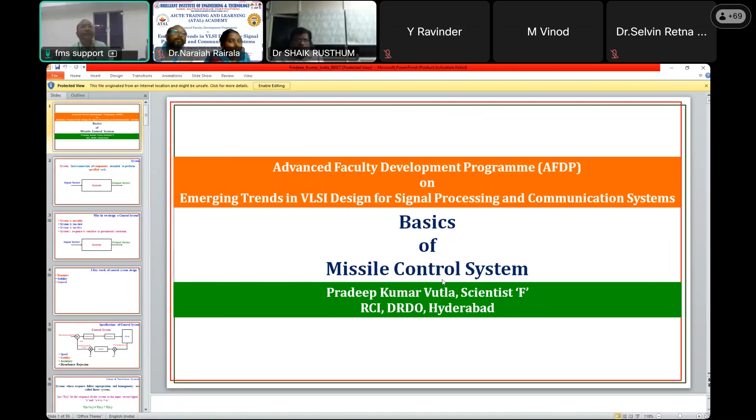Sir, before starting the basics of the missile system, is the slide shared clear to you, sir? Across all? Yes, sir, yes, sir. Yes, sir, yes, sir. Right.

Thank you. Let us start with a system, a basic system. These need not be the standard definitions, but acceptable and understandable to give you a feel of what exactly a system is. It is just an interconnection of components to perform specified tasks. The components of any given system—it may be a Xerox machine, a fan, a missile, or a cycle which we ride—are connected together by a cause and effect relation. So every system has an input.

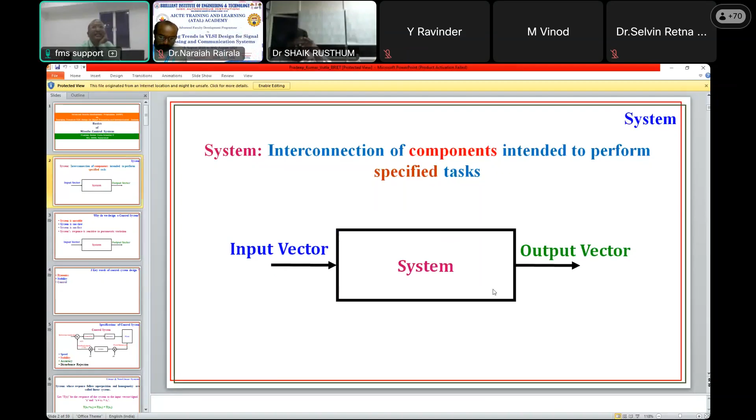Next, why do we have to design a control system for a system already existing? It so happens that the system could be unstable.

Sir, I'm not getting the voice here. Is anyone interrupting? No, your voice is clear, sir.

Right. Sir, the basic objective of design of control system goes in these lines. If the system is unstable, we need to stabilize it, or the response times of the systems are not up to the mark, not up to the requirement, or the system has got parametric variations and the response of the system is very sensitive to the parametric variations.

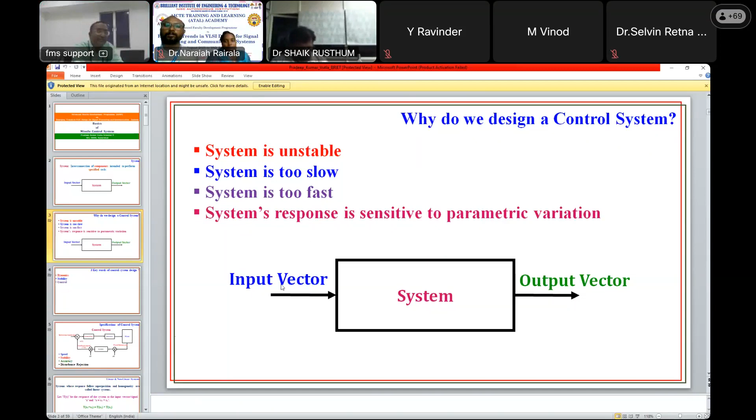In the field of control system, we came across these three terms invariably: dynamics, stability, and control. When we say dynamics, it involves the mathematical modeling of a given system, understanding it, and checking the stability of the system that is already mathematically modeled via dynamics -- understanding the governing dynamics of the system, studying it mathematically using the mathematical model, and then commenting on the stability of the system.

Then we can see whether the system is stable or not. If not, it's our onus to design a control system to stabilize it. Stabilization I will expand in the subsequent slides.

And control of the variable -- the system has to be stabilized and specific variables are to be controlled because we want them to behave the way we want. So the control comes in that aspect. So as a control engineer, we live in this three-dimensional space: dynamics, stability, and control.

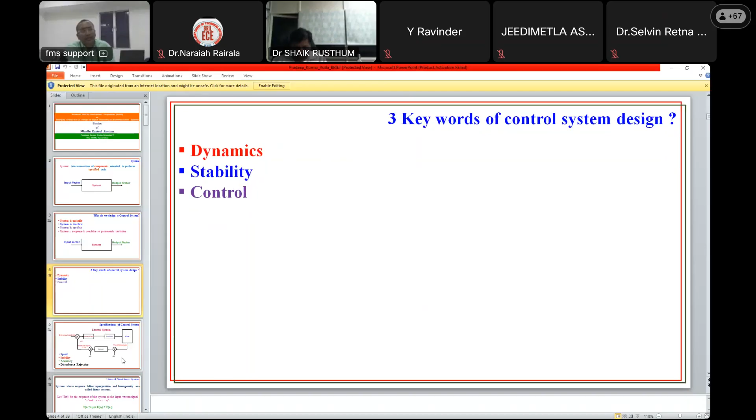Sir, is the voice clear? Yes, sir. It's clear, sir. Proceed, sir.

In an actual physical manner, there are two kinds of disturbance inputs which I would like to emphasize because I started with dynamics. In the previous slide, I started with the dynamics of the plant. No tool or no way can we completely represent the dynamics of the plant -- a perfect replication of 100% behavior of a plant is not possible.

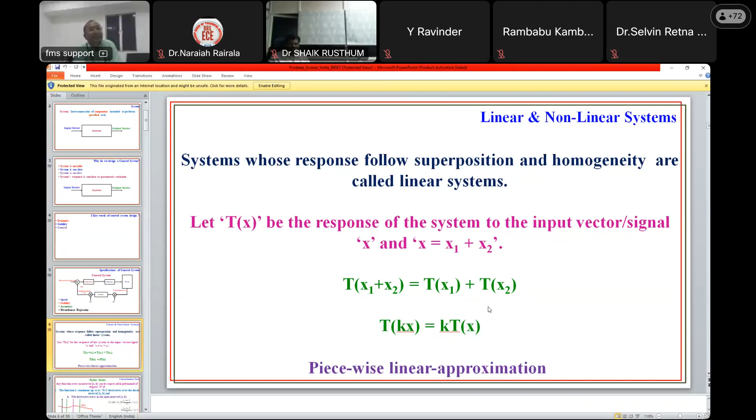And the main tool of linearization that comes to be is the Taylor series. Although these definitions are well written in the textbooks, I'm not going through all those things. I want to make you have a feel of what exactly happens, what functions do we see in the missile industry, and how do we handle it.

That's my part of handling the course like this. The Taylor series basically gives the structure of a function -- how the functional value and the derivatives govern the functional value, the instantaneous functional value.

Now, if we take care that x is so close by to c, in the expansion the higher order terms go to zero -- they become negligible.

This is the way we linearize the system in aerodynamics. We linearize the system and use linear control system design philosophies. Although we are introduced to single loop control systems at our Bachelor of Engineering level, it is rare that we actually use single loop control systems. We go with...

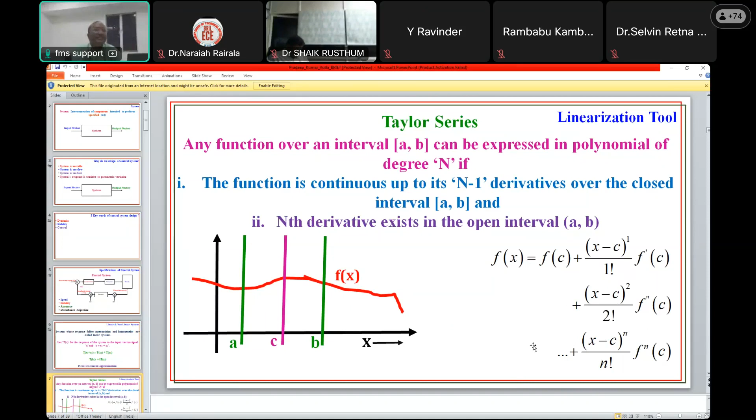So apart from linearization, I want to make you have a feel of the functional behavior. The functional behavior is depending on its derivatives also - what we are seeing is derivatives also. So in order to control a signal, if we could control the derivatives also, the shape of the signal becomes very well. This motivates us to use multi-loop control systems when we are expecting a perfect control of the expected control variable.

Going into the next level, time variant or time invariant - the definitions are very known to you. For a given missile system, missile mass changes as it flies. There is a propulsion system that is accelerating the vehicle to higher velocity, and the vehicle is flying, it does obtain the aerodynamics and so on. So the aerodynamic plant happens to be a time variant system, and while designing a control system for a missile, we time slice the plant and extract the transfer functions and go for the design of the control system.

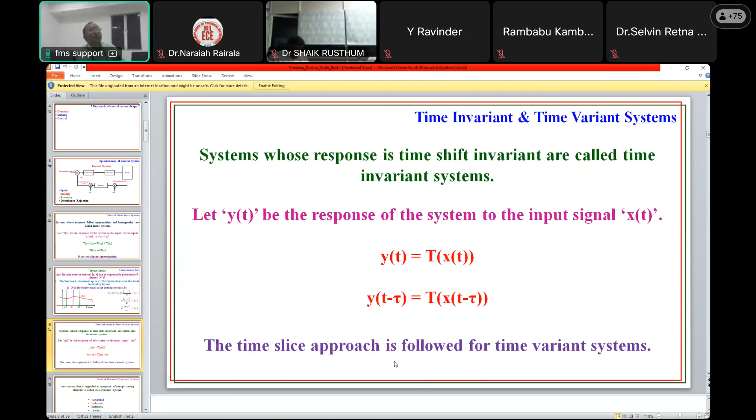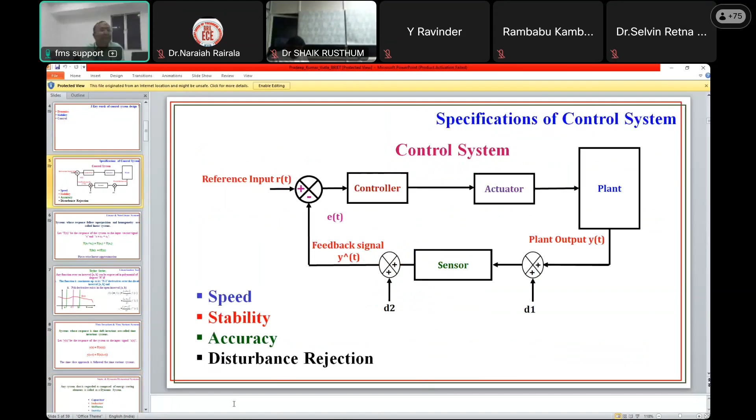Control system - I'm going back to the very first slide. This particular box, we are referring to as PID controllers, those compensators which we academically learned at BE level, and now we are applying them here. Going into the next level, the dynamical systems we face - it is ubiquitous that everywhere we face dynamical systems.

Sir. Sir. It is clear, sir, okay. Yeah, audible and clear. Right. Thank you. Thank you for the update.

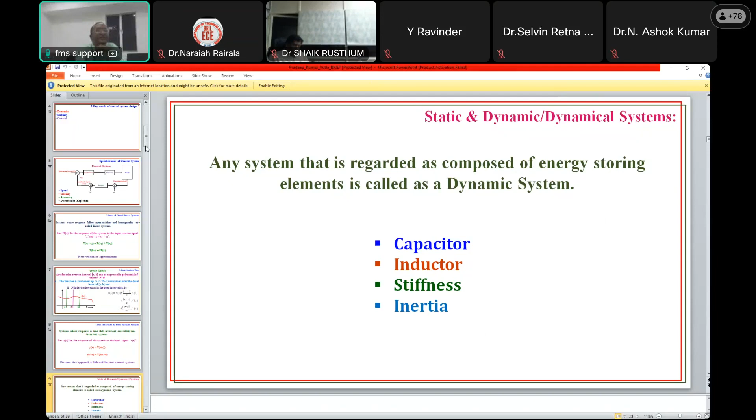The dynamical systems are ubiquitous. What we mean by dynamical system - when we are mathematically modeling energy storing elements like capacitors, inductors, or if it comes to mechanical things, stiffness and inertia, we call them dynamical systems. As electronics and communication engineers, wherever there is storage of energy, there come some differential equations. So dynamical systems are characterized by differential equations. When we mathematically model them, we see that they are represented by differential equations.

As a small example, just rehashing our basics - if a differential equation is formed by linear combination of a function and its derivatives, it's a linear differential equation. And if that linear combination has got a variable that is the independent variable, it is a time variant system. But if it is not a linear combination, that means the function is in multiplicative form - function multiplied by its own derivative - these kinds of systems are referred to as nonlinear systems.

So just having a brush up of our higher engineering mathematics, I'm taking you through those things. Wherever we are seeing a differential equation, this is the plant, and this is the forcing function. Forcing function is a function that is in our hand. We can control the plant by actuating this, by proper modification of this forcing function. This design of the forcing function is nothing but design of control.

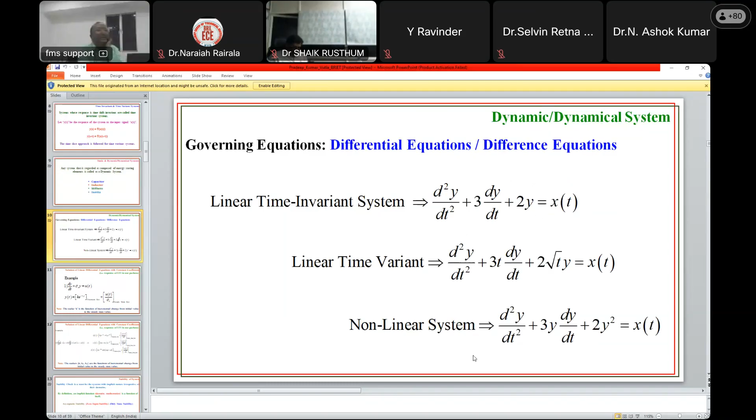It is a linear differential equation. When we express the response of it, it has got two parts - transient response and steady state response. The transient response, if we see, is characterized by the root of the auxiliary polynomial here. Everything I am showing here is in the time domain. Let us appreciate the time domain first, then frequency domain, then the transfer function and things like that. First, let us understand at the very first level what happens in the time domain. So this transient response is mainly characterized by the property of the system, that is sigma naught.

Before going on to the stability of the system, it is just that linear systems are so simple that the response is also a linear combination of transient response and steady state response. Since this simple addition, simple scaling, is easy to design, easy to test, easy to evaluate, people still go by the linear control system philosophies. Anyways, they impart 90% of control - they impart good results. Similarly, I'm taking you through a second order differential equation. When we see, based on the nature of roots, we have transient response and steady state responses like that.

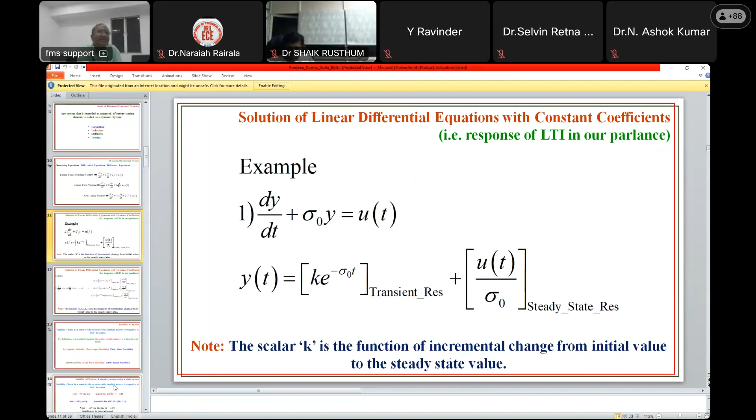For a linear system, both bounded input bounded output stability and asymptotic stability state that the poles of the system, the roots of the differential equations, have to be on the left half of the S plane. S is a complex plane, which you already know. We express it in sigma plus j omega, the real part and the imaginary parts.

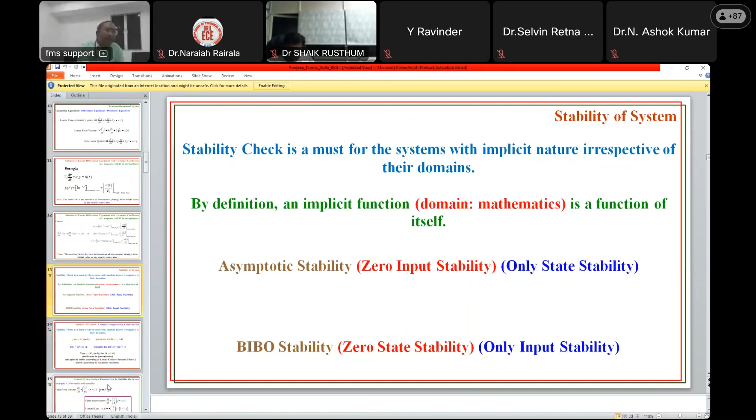Straight away, a small example: if a person is doing C language, he has written something like y equal to k into y, previous y, a simple example. This has formed a loop basically. The function is depending on itself. This is a basic C language example.

Suppose if the value of k were less than 1 in magnitude, this would be a stable system. If it is disturbed from 0 to a non-zero state, it will come back upon progressive multiplications by less than 1. It is brought down to 0.

That's how stability works here. And if the value of k is greater than 1, imagine this goes out of bound. What if k is 1? The value of whatever the disturbed value apart from 0, if non-zero, keeps on oscillating. We call this system an oscillatory system.

In linear philosophy, this is a marginally stable system, because the poles are on the j omega axis of the S plane, and according to Lyapunov, that too is a stable system.

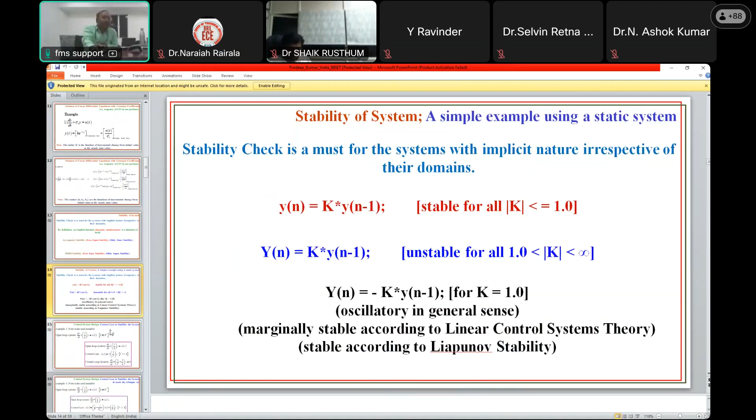A small exercise that gives you a feel of what control engineers do, whether it is a missile, a cycle, bike, or any automotive, or any system like that, any biomedical system also. All are governed by the differential equation, basically dynamics, the mathematical modeling of the governing dynamics of the system. Let's have a system like this, where tau is a positive real number.

This is a fashion. All that we needed was a sensor and a gain. A sensor to sense the output of the system, and a gain over that gives our desired response, and we have placed it, and we have a desired pole in here. This is the way control system design happens, which I had shown you in the first, a closed loop negative feedback system.

Little more on that, same problem statement. Measure y and place y means we have a sensor that measures y and places a gain on that, stabilizing the system. And if we have further control, we can place a reference input in here. If now the system is made to follow this reference input, unlike the previous system, now it is a tracking system. That means we have stabilized the system and designed a control for the system for it to behave in the way we like it.

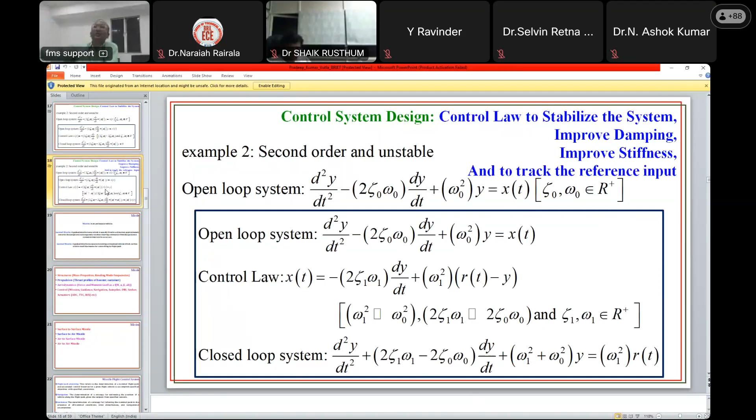So here ends the very basics of a control system. That means we have a control system which may be stable, unstable, or response times are not meeting. To stabilize the system, we have to bring the poles on the right half of the S plane to the left half and place them in a particular fashion as governed by our root locus, which we had studied at our BE level. That is the limit for a given closed loop control system, and we check whether the response times and the stabilities are met. Once the response times and stabilities are met, the design what we had done is perfect.

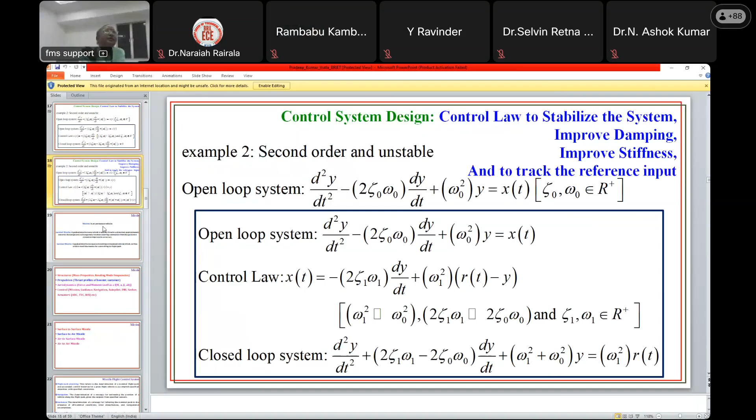Having completed those basics, now I am taking into the missile parlance. Missile is just an aerospace vehicle meant for delivering an object from point A to point B, from launch point to target point. And depending on starting from the inception of the aerospace industry in 1906, the First World War, the Second World War, the phases of guidance, phases of missiles have changed much.

At that point of time, whatever technology was available, they had given these definitions as per those technologies. For example, guided missile, a very old definition: the guided missile is one that is approximately fired in the direction of the target, and there are some ground stations that guide the missile to go towards the target.

Nowadays, the missiles are this kind of things - that means missile can change its flight paths. It can see the target with the sensors in itself. That means the organs it is carrying in itself, it is able to control by itself. This is the way we are controlling. Anyways, these both definitions work, and DRDO works on both kinds of missiles like this.

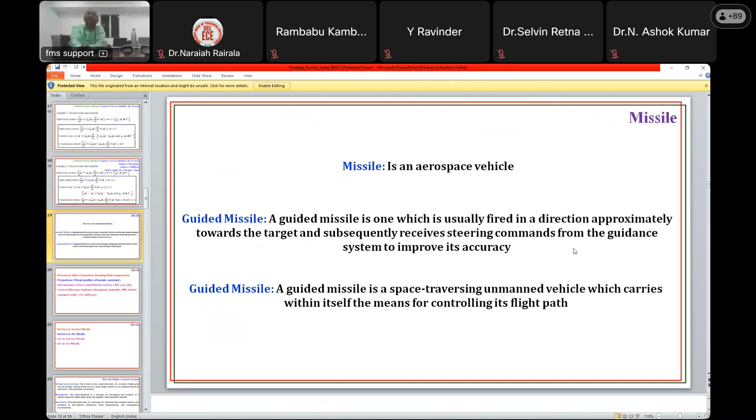Going into the next step, when we are talking about missile, aircraft, spacecraft, or things like that, this is aerospace industry. The story goes like this - it is a story of four brothers. Like four brothers, we have structures, propulsion, aerodynamics, and control.

Structure is the housing, the civil structure. Our houses, our homes, which we are residing in, are civil - it is just a house with load carrying pillars, load carrying members and things like that. Similarly, an aircraft, a commercial aircraft, and missiles will have the pillars. They call them particular terms, particular terminology in aerospace structures. I'm not going deep into them. We need to have a housing, and that housing is done by structural engineers.

Next, we have a structure, but it has to be moved from point A to point B. It has zero speed, so here comes the propulsion person. They design the propulsion system. That means just as fuel, petrol, diesel, or CNG we have for automotive domain, we have specific propulsion systems for missiles - that means boosters and sustainers. Boosters are the propulsion devices that take missiles from zero velocity to higher velocity in lesser time, while the sustainers maintain the velocity, just cancelling out the drag that is brought in by the speed of the missile, so that it persists and has a good time of flight.

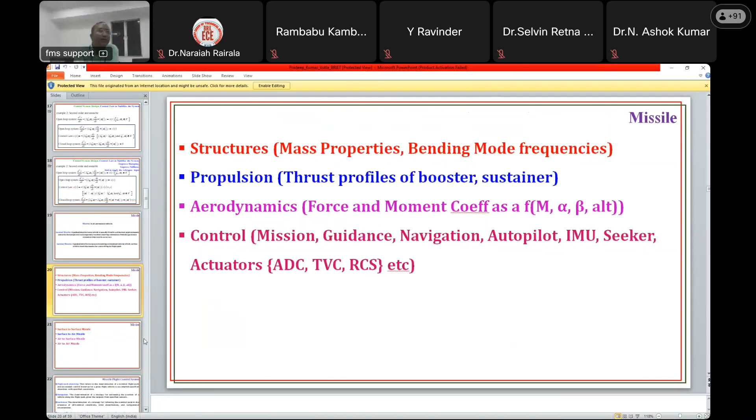Based on the mission, missiles are categorized, starting with surface to surface missile. Basically, the strategic missiles are surface to surface, because of which we can have strategic advantage over other countries - like 5 years strategic advantage, 10 years strategic advantage. They look into that kind of things.

Surface to air missiles - surface to air missiles are defensive category. If some aircraft are coming into our airspace, as area defense, we use surface to air missiles.

Air to surface missiles are mostly offensive - that means we go into some other's territory and damage their resources. Air to air missiles have both offensive and defensive structures. When we fly an aircraft and it is being followed by another aircraft, in order to come out of that, we use air to air missiles.

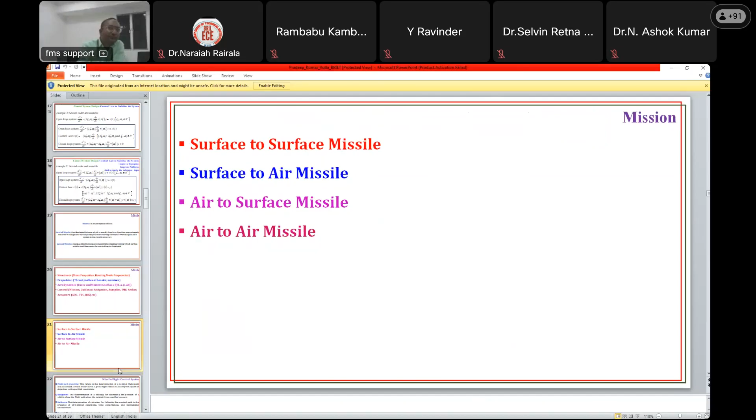In the domain I am working in - the missile flight control system - these four terms are very important. Not going into full definitions of them, I am just taking you through flight path planning. As I have already mentioned, a missile is an aerospace vehicle that goes from point A to point B. Point A is the launch point and point B is the target point.

Based on what we are optimizing, we can optimize the energy of the system or the resources of the system. We have to design a flight path from launch point to target point. It is the trajectory - flight path is the reference trajectory. In a normal sense, this reference trajectory can be designed before the flight or within the flight.

Navigation is the one which tells us where the vehicle is, the position of the vehicle, and what speed it is going. This is an important term because this is the sensor part of the missile system, the sensor part of the missile feedback control.

Guidance is the upper level of the control system for a missile, the outer level of control system that maintains the trajectory as governed by the flight path planning. We have a flight path already planned, and guidance is about how to execute that flight path using kinematic variables like acceleration, velocity, or position.

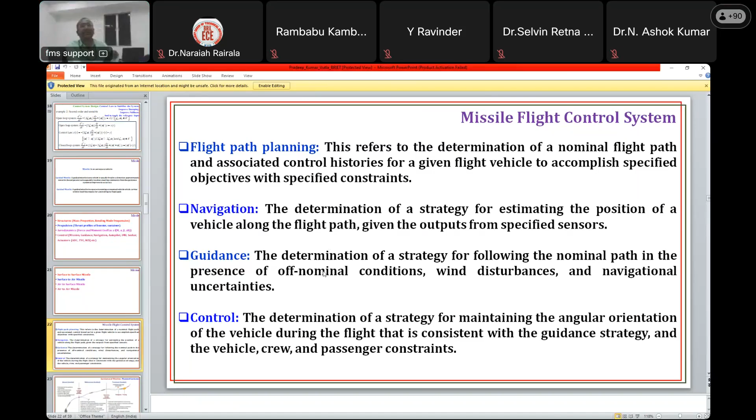I am showing a normal picture of the general phases of guidance and what control does. First, let us take a static target - we have designed a trajectory first. That comes as flight path planning, and then there is guidance.

Sir, somebody has a question, or may I continue? Yeah, continue, sir. Continue.

We have a planned flight path, and the guidance system is a closed loop control system per se. It corrects the velocity and position so that the trajectory is maintained. This velocity and position are kinematic variables - they do not worry about anything else.

But when it comes to autopilot, control is an autopilot that stabilizes and controls the airframe with respect to the center of gravity. That is what actually does the motion of the missile with respect to the velocity vector, so that those forces are attained from aerodynamics and the trajectory correction is done.

Roughly, the phases of guidance would be: first the boost phase. This is a smaller phase such that the missile safely comes out of the launch platform. Here I am showing a ship - this launch platform could be an aircraft, a helicopter, or an airplane. There would be a maneuver with which the missile comes out such that there is no damage to the launch platform. This part of the trajectory is like that.

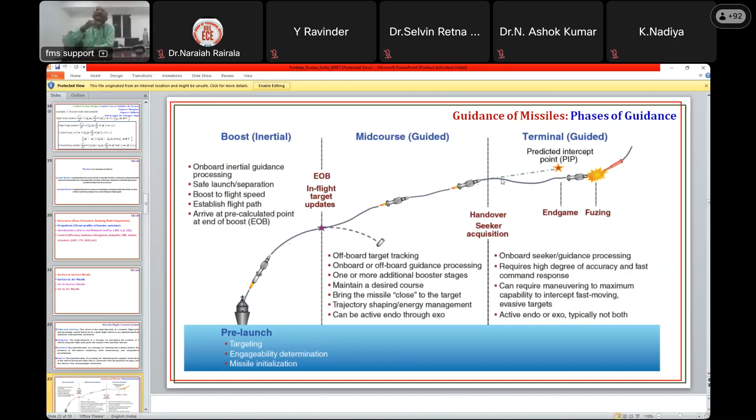Now from here, there is an instrument or device on the missile called a seeker. The seeker actually sees the target - it might be optical, infrared radiation, or a radar seeker. Once the seeker sees the target, the guidance philosophy changes from mid-course to terminal guidance, where the missile is guided by the seeker, not by the INS. This is how an actual guided missile system works.

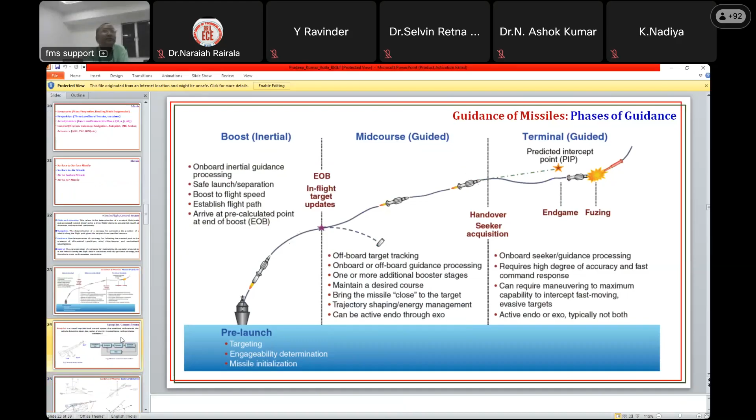Our thrust area is autopilot design - I am an autopilot designer myself. Before going into that, a missile looks like this, with the center of gravity as origin, the x-axis drawn towards the nose, the y-axis drawn towards the right side, and the z-axis drawn downwards.

This is the missile body frame, wherein the vertical plane containing the x-axis is the pitch plane. The missile or aircraft doing nose-down motion is called pitch motion, and if the missile or aircraft moves right side or left side, that is called yaw.

But if the missile is rotating about the x-axis - meaning this control fin is coming down and reaching here - that is roll motion. Accordingly, there are three kinds of motion I am focusing on, though technically there are 6 kinds of motion. Since there are 3 kinds of motion happening with respect to the center of gravity, there are 3 autopilots: pitch autopilot, yaw autopilot, and roll autopilot.

Then what is an autopilot? Autopilot is just a closed loop. As I have already shown you the closed loop feedback control philosophy, it is a closed loop feedback control system meant for stabilizing the airframe and controlling it as per the guidance requirements.

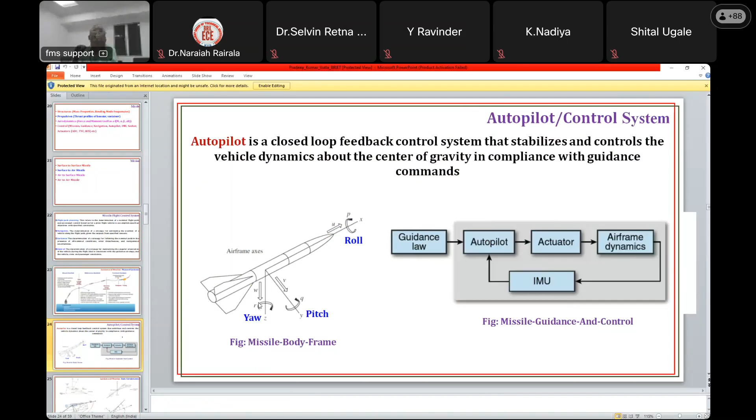How is it controlled? How do aerodynamic effects come into play? I will explain in the next slides. Take it for granted that these fins rotating about a hinge line will control the motion of the missile about the center of gravity. As I have already introduced, in the differential equation x of t is a forcing function controlling the vehicle. Here that x of t is the deflection of these control surfaces. That simple it is. These control surfaces are to be driven by proper pitch control law, yaw control law, and roll control law. Only then the missile would execute what it is expected to execute.

A small note on aerodynamics, because we are electronics and communication people, mostly not aware of mechanical things around us, just a small feeling so you can appreciate it. In the missile field, as I am working in, missile or any aerospace structure, if the missile is moving fast or the air is, or a missile is stationary or air is blowing onto it, it is the same. The dynamics performed by the moving fluid on the structure is called aerodynamics. If the fluid is air, it is aerodynamics. If the fluid were water, it is hydrodynamics, and so on.

The main important thing is, when the vehicle is going from 0 velocity to a particular velocity, it will have a relative velocity vector. In our case, it is the relative wind that is coming. When we are going with a certain speed, that means the wind is blowing with that particular speed at us. So if we have the missile properly oriented into the wind, nothing is going to happen. It is not causing any side force. For the missile to fly up or down, we need to have an angle between resultant velocity, relative wind, resultant velocity of missile or relative wind.

We have to maintain an angle with that wind. Only then can we get a certain amount of lift that pushes the vehicle upward, so that gravity is overcome and we could see a flight. What is this angle called? This angle is called angle of attack, or alpha.

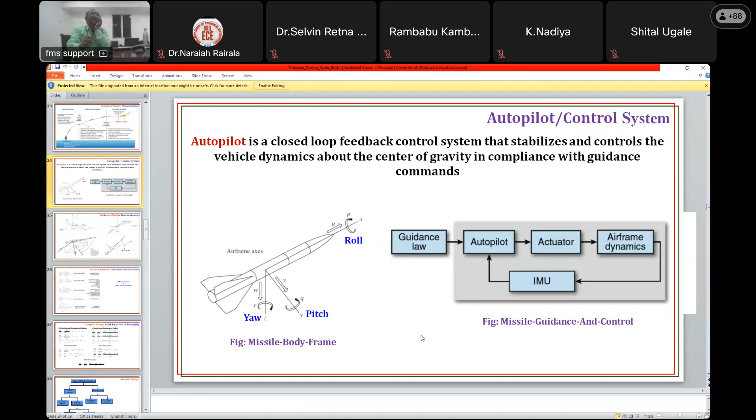Based on aerodynamics, people use tail control surfaces and wing surfaces, either for control, or for control and lift when placed at CG. Mostly wing surfaces are used for lift. Tail control surfaces and canard control surfaces are used for control of the missile. If the missile CG is somewhere here, and the control surfaces are towards the nose side, they are called canards. If they are towards the tail side, they are tail control surfaces.

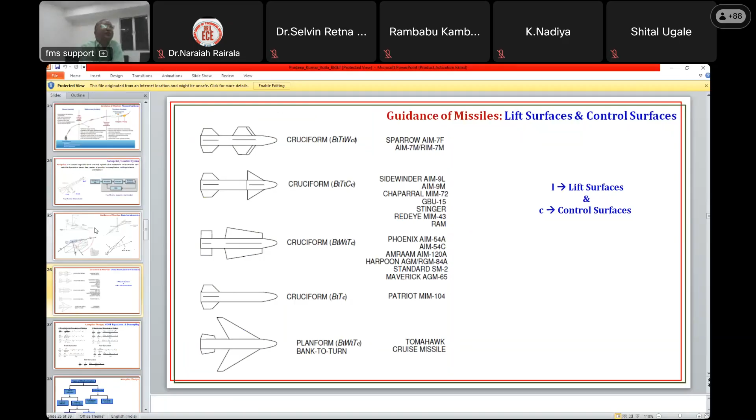Both control surfaces do the same thing; their deflection controls the missile. So how do we control the missile? As I told you, this missile making an angle with the velocity vector has a force and moment, force along Z and moment about Y. Similarly, when we deflect the servo mechanisms connected to these control surfaces, they deflect by an angle, which in turn makes an angle with the local relative wind.

That gives us some side force, like opening a door, and there is a moment from here to the center of gravity. As there is a side force, there is a moment about center of gravity. By applying torque through a smaller control surface with smaller force but greater moment, the missile rotates. By rotation of the missile, we get a new alpha, a new force, and a new trajectory. That's how the missile control system works.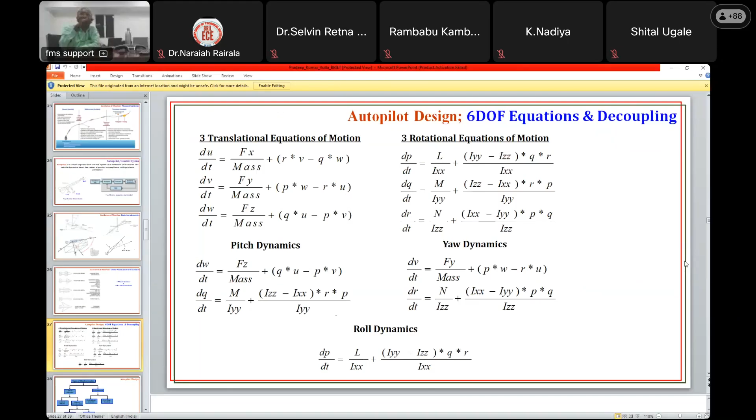In detail, the 6 degrees of freedom equations have 3 translational motions and 3 rotational motions. There are 3 axes: pitch, yaw, and roll. For pitch, 1 force and 1 moment. For yaw, 1 force and 1 moment. For roll, 1 force and 1 moment. So we need to control each individually using those control surfaces I had shown. Similarly for yaw and roll, we use the same control surfaces. These 3 control surfaces are shared among pitch, yaw, and roll, and all three are controlled simultaneously along and about these axes.

If the missile has to go up, I need to give a control surface deflection like this. It has to give a force downward, so that with respect to center of gravity, the torque is in this direction, and a moment is applied about the y-axis. That moment causes an angular acceleration, resulting in an angular rate, resulting in an angle over time, causing an alpha. That alpha results in an acceleration. Hence the missile moves. So the missile cannot translate just like that; for it to go in a particular direction, it has to rotate and translate.

The complexity of the system—I need some feedback, sir, whether it is audible and clear to you, and whether the slides are clear. Audible and clear, sir. Proceed.

So first there has to be rotational motion entailing translational motion. Here comes the crux: any autopilot stabilizing the missile system has to control that rotational motion and in turn the translational motion. Based on that, missiles have pitch, yaw, and roll autopilots. Roll autopilot about the x-axis controls missile rotation. There are roll attitude control autopilots and roll rate control autopilots, depending on application.

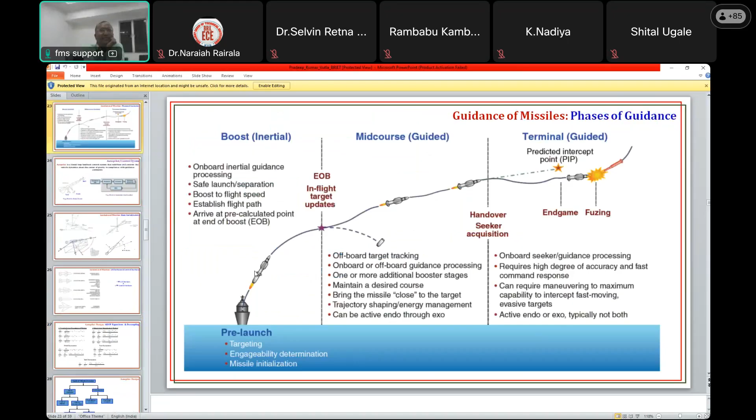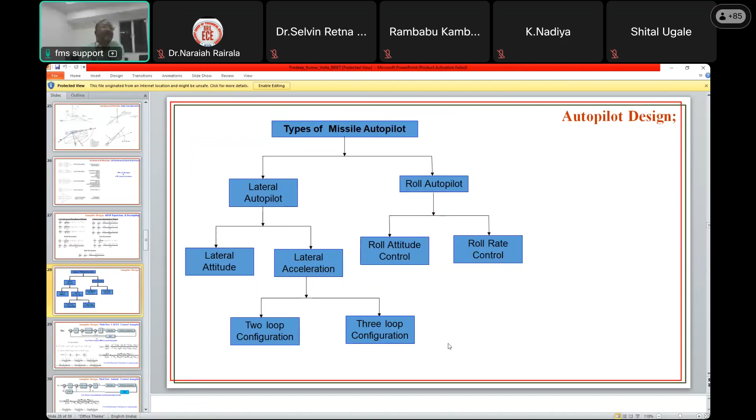I'm taking you to the actual autopilot structure. We have pitch, yaw, and lateral control, which are identical. Excuse me, I'll have some water.

This is the airframe. Airframe means the actuator at the tail end that moves the tail control surfaces. In this pen, these are 4 tail control surfaces. When they move, they cause rotation and translation motion of the whole vehicle, and those dynamics are captured here in terms of transfer function.

When an actuator has given a deflection, the whole missile rotates. So there is a deflection-to-rotation-rate, missile rotation rate transfer function. Similarly, as the missile is rotating, over time there is an angle developed that results in an alpha that causes an acceleration. So from deflection to total missile acceleration, there are transfer functions. In essence, there is a rotational transfer function and a translational transfer function.

Finally, our requirement is that the translational transfer function has to meet the trajectory. But in order to do that in a proper fashion, we need rotational motion. So in a given autopilot, this is a closed loop control system where this is the acceleration command required by the guidance system. Here are the inertial measuring units.

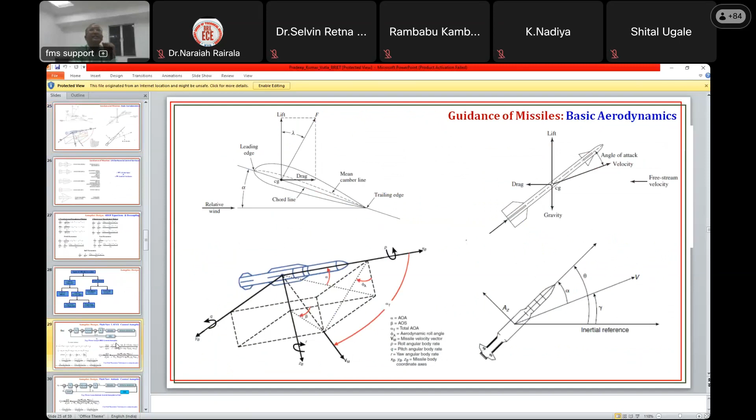We have seen these two differential equations, the transfer functions. The roots of the denominator polynomial give us the stability of the system. If they are on the right half, the system is unstable, meaning the missile, when disturbed, will go in one direction and never come back. We have to employ an actuator with proper torque and bandwidth, such that although it is an unstable system, it can be damped and brought back with the control power we have. While designing the missile, the aerodynamic control surfaces are sized such that the moment and power delivered is more than the disturbance power in any condition. Only then can we win over disturbances and keep the missile on the expected trajectory.

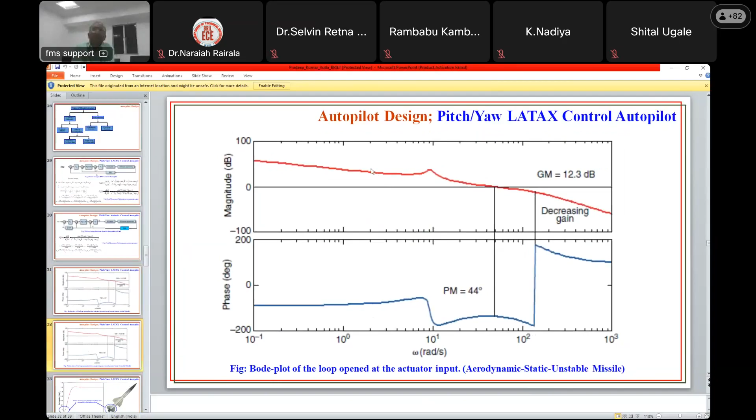But for an unstable system, something peculiar happens. I did not copy the unstable system part, I missed it out, so I'll explain orally. For an unstable system, a phase crossover happens here also. That means if we reduce the gain, that system is going to be unstable. I'm sorry, I did not put the other part of the Bode plot, but to give you a feel, we will have a phase crossover here itself. That means if the gain comes down, the system goes unstable, and if the gain is too high, the system also goes unstable from the stable part. So there is a bracket of gains; we cannot have gains as high or as low as possible. We have to choose the gains properly within that bracket.

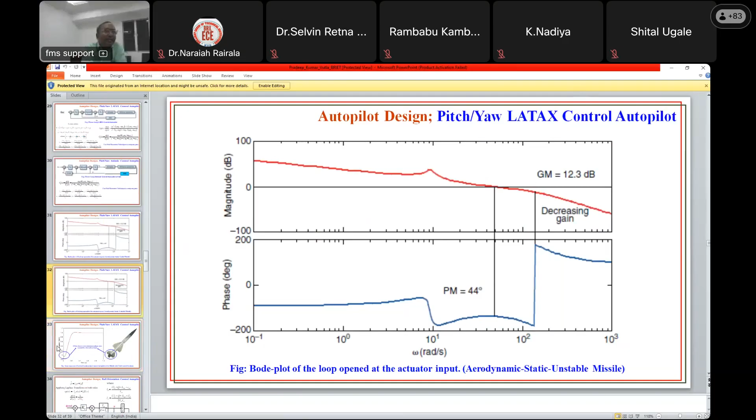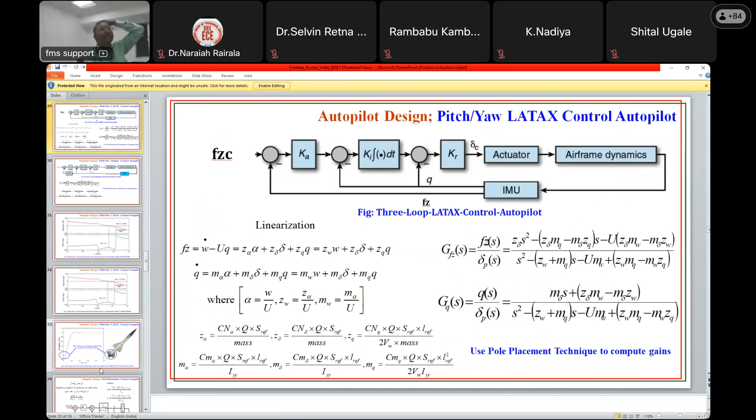In missile philosophy, since we use tail control surfaces, there is a phenomenon called the non-minimum phase zero effect. In order to pull the missile up, I have to deflect the surface down like this. Air flows like this, causing acceleration first in this direction. The vehicle rotates upward, and then the major acceleration happens towards the upward direction. This non-minimum phase zero means the transfer function has a zero on the right half of the S-plane. This does not disturb the stability of the vehicle, but causes an unusual phenomenon: if we want acceleration in one direction, initially the acceleration goes in a different direction.

Since pitch and yaw autopilots have already been discussed, there is also a roll autopilot using a roll angle stabilized missile, where we want the roll angle to be zero. To control roll angle better, we keep the roll rate loop innermost, meant for stability enhancement or damping, while the outer loop is for stiffness enhancement. When these gains are properly designed, if the missile is disturbed in roll, it gets back to its roll orientation of zero so fast that the pitch and yaw autopilots will not be disturbed by this motion.

In the final implementation, what we have designed...

Sir, just as a feedback, are the slides clear and my voice is clear to you? Yes, sir, it is clear.

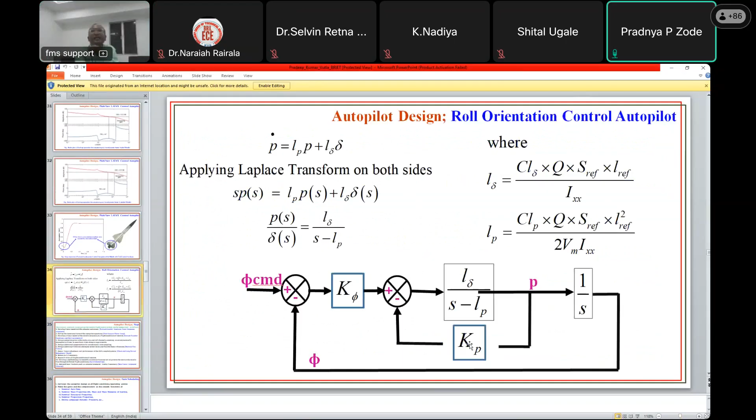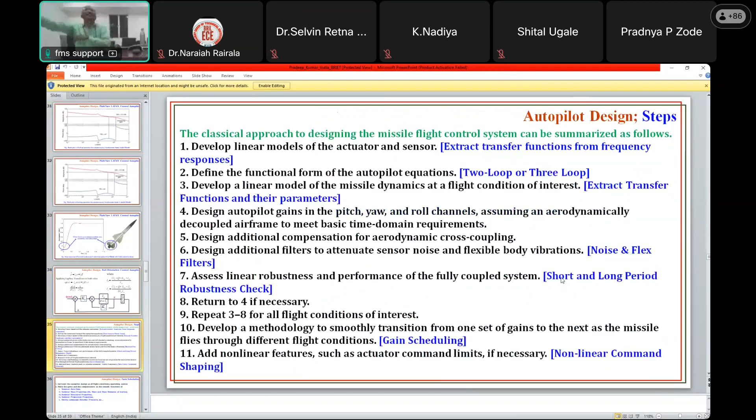An autopilot is designed for an operating point. That means K phi and KP are for a particular operating point, and KI, KA and KR are for particular operating points. As the operating points change, we have something called gain scheduling. As the operating points change, gains also required to be changed.

So we make gains as a function of aero data, the nominal aero data on the flight, nominal mass properties, and the progression of these properties, structural properties, propulsion properties. These tables we carry in the onboard computer of the vehicle, and we change the gains on the fly based on the operating condition, controlling the missile to meet our time response specifications, stability time domain specifications, frequency domain specifications, and frequency domain stability requirements. This is the story about the control law design for a missile.

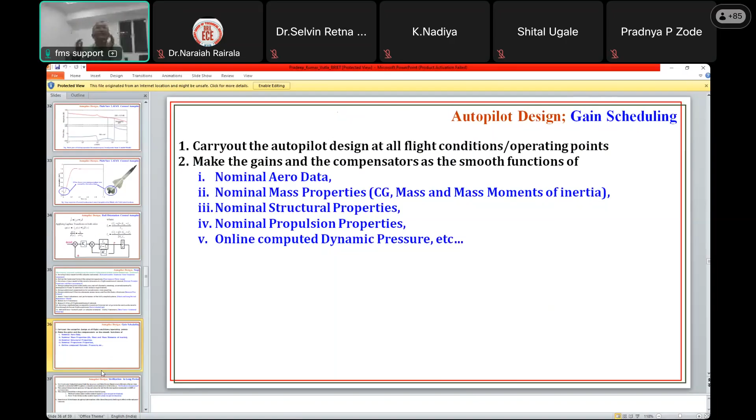These are some additional topics, like control actuation systems. As I had already shown you, a control surface deflects and causes an aerodynamic force to change. That aerodynamic force, acting at an arm length from the missile center of gravity, will rotate the missile because it is applying a torque. So these control surfaces are aerodynamic in nature.

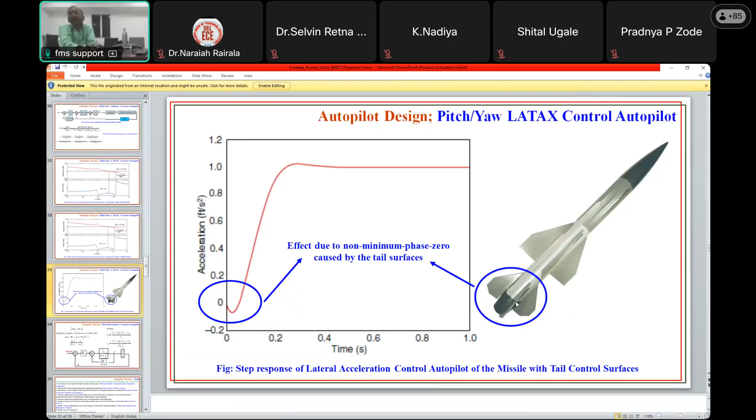Not necessarily all the actuation systems are aerodynamic in nature. There are thrust vector systems, meaning there are control surfaces that can change the direction of thrust and hence rotate the missile in the way we like. And there are some reaction control systems.

I have already completed the autopilot design, the basic control system design of the missile, and I am introducing some other control elements so that when you go into any content on the aerodynamic side, you will get to understand.

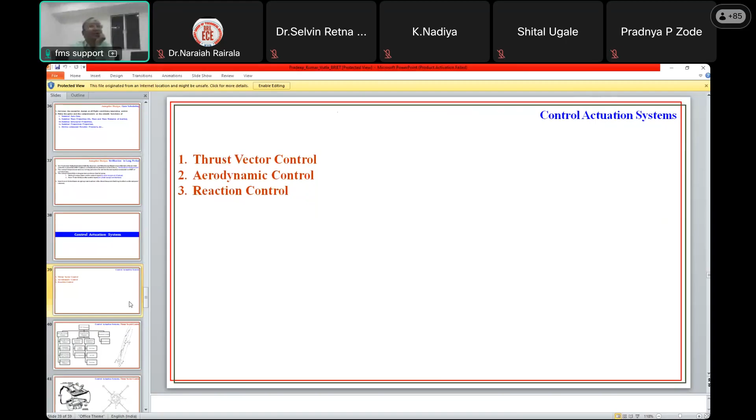Thrust vector control: for example, if we go for bigger strategic missiles like Agni or Prithvi, we have bigger missiles with big boosters, meaning huge thrust they carry. There, in order to maintain the orientation of the vehicle, the nozzle is moved. This philosophy is called thrust vectoring. If the nozzle is moved, that nozzle is called a flex nozzle.

Apart from that, this is a flex nozzle implementation. There are two actuators that can move the nozzle. When the nozzle is moved, you can see that the major portion of the nozzle is causing the thrust, meaning causing the vehicle to go forward. Apart from that, there is a side force that is causing a moment about the center of gravity. Moment means torque about the center of gravity, which causes the missile to rotate about the center of gravity.

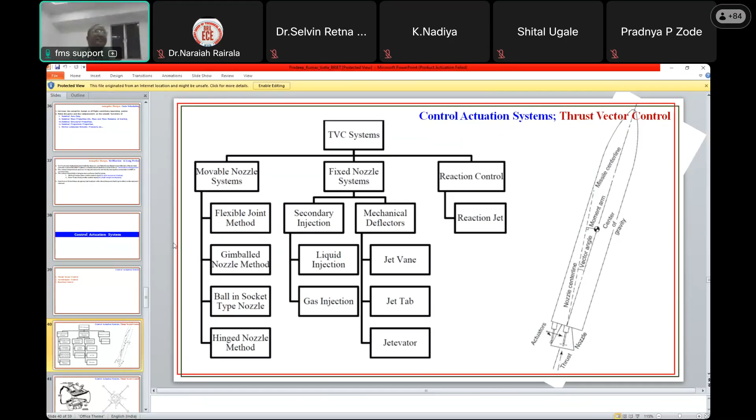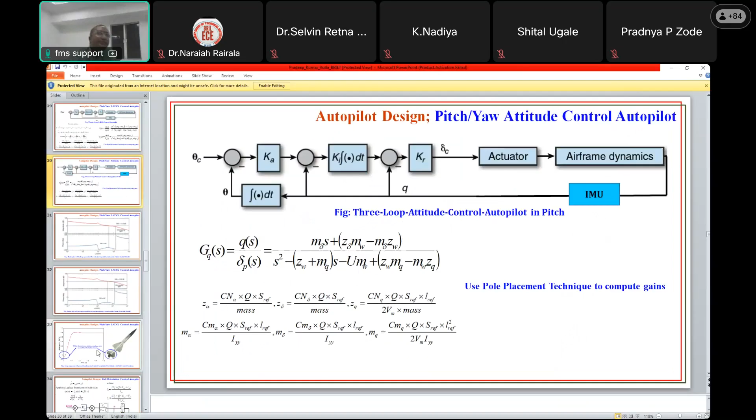So this is the control input, meaning, as I mentioned, the forcing function in the differential equation. This is the forcing function through which, as we have seen in the autopilot, it depends on body rate feedback, the angular rate, and the acceleration or attitude feedback. That's the way we control the missile.

And there are other techniques: rather than having a nozzle, as aerodynamic control surfaces, there are control surfaces in the flame also. If these control surfaces are deflected about these axes, that also causes side force. For example, a force along Z at the tail end will cause the missile's nose to go up. A force along Y will cause the nose to go leftward, if we are looking into the paper with the nose already pointed into the paper this way. This kind of actuation system is referred to as thrust vector control.

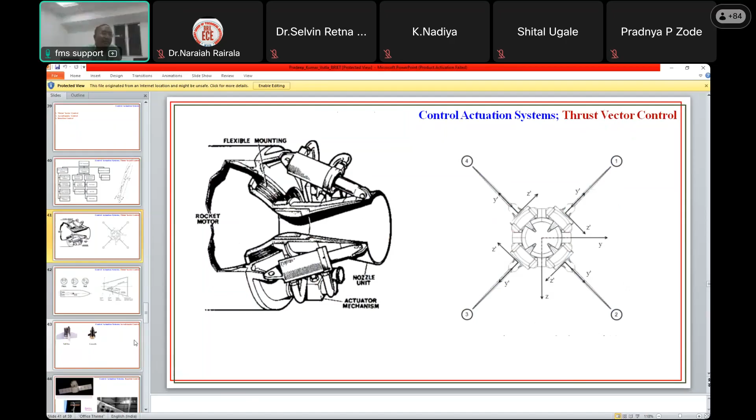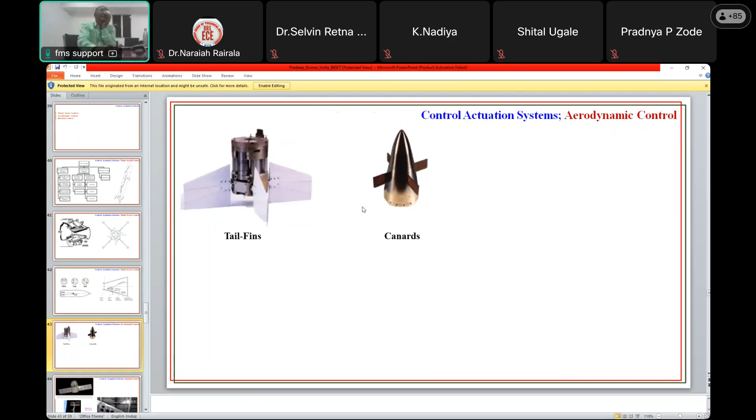As opposed to them, there are aerodynamic control surfaces. If they are on the tail end, they are called tail control surfaces. If they are on the nose end, they are called canards. So missiles can be controlled by either tail surfaces, canards, or thrust vectoring, and things like that.

There are some not-so-usual systems, used by ISRO and wherever missiles go out of the atmosphere, called reaction control systems. In order to rotate the missile, since out of the atmosphere there is no aerodynamics, we have to fire these thrusters to have a rotation. If you had seen the movie Gravity, the lady fires thrusters to change orientation—those are reaction control systems.

Similarly, there is another graph that is missing—there are other reaction wheels also. Let me explain: if there is a satellite or satellite-like structure that has to rotate, some reaction wheels are rotated in a particular direction in order to rotate, because everything happens in reaction.

Newton's third law of motion: for every action, there is an equal and opposite reaction. If there is a motor rotating clockwise here, that could rotate the whole structure in an anti-clockwise direction. But because of the law of conservation of momentum, the bigger structure moves slow while the smaller structure can move faster.

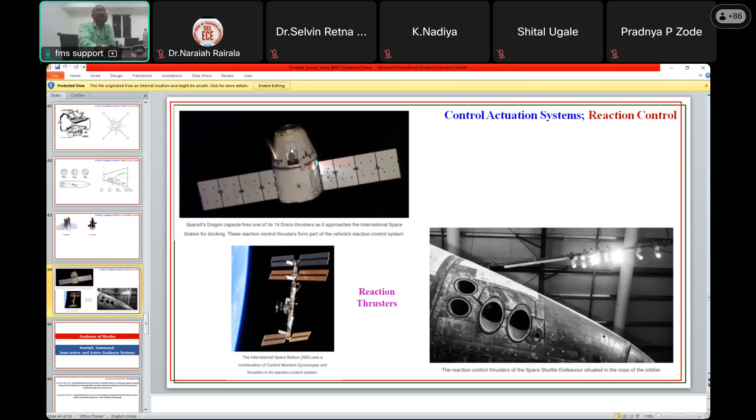Some concepts about guidance of missiles. Guidance I have already told you - guidance commands for kinematic entities like velocity and position of the vehicle to be corrected. Guidance is a control system which is a loop one level higher than autopilot, which we had termed as the stabilizing and controlling entity of the missile with respect to center of gravity.

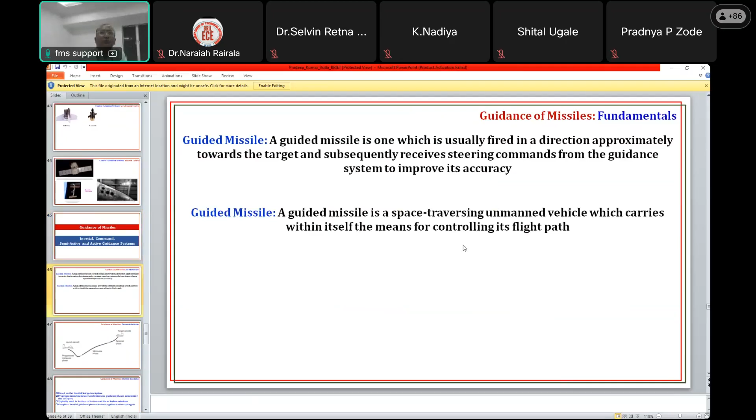These definitions of guided missiles I have already introduced you to, and the basics. For example, aircraft to aircraft, a missile has to be fired - there would be some pre-program to ensure this. There is a mid-course guidance based on ground stations or based on inertial navigation system carried by the missile for mid-course guidance, and there is a seeker that takes on the target, and the missile is guided towards the target by the seeker. This part is called homing guidance.

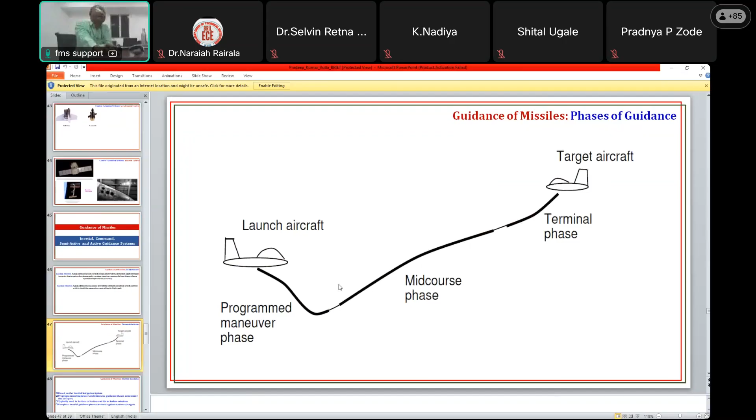I'm talking about inertial guidance now. Inertial guidance is mostly based on inertial navigation system. There are pre-programmed maneuvers, and mid-course guidance phases come under this category. Suppose there is a surface to surface missile, meaning the launch point is on earth and the target point is on earth - in such cases, inertial guidance is the first thing to be followed.

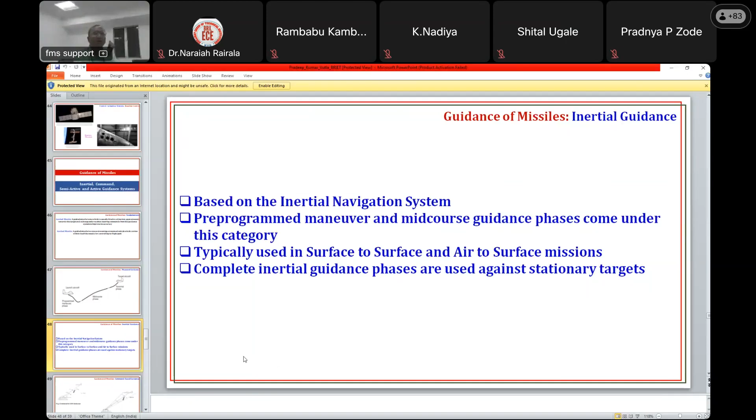There are other guidance philosophies like command-based guidance. We have a radar, it knows where the missile is and where the target is. It will transmit these things to the missile so that the missile corrects and comes onto the line of sight, eventually hitting the target. This is called command to line of sight - the missile is commanded to come onto the line of sight between ground station and the target so that it could hit the target.

With little lesser logic, the missile is fired and has some entity, some control system at the back end that adjusts itself to the center of the beam of the radar, such as to keep the missile always in the center so that it can go and eventually hit the target. These are certain kinds of philosophies. When we go into the guidance philosophies broadly, there are two kinds of philosophies.

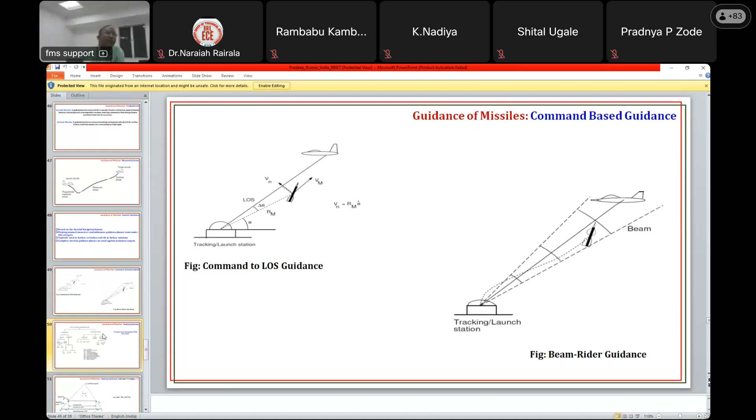One is pursuit guidance and the other is proportional navigation guidance. Pursuit guidance is like this: the missile is always trying to point at the target. It so happens that we have gone so close and the target maneuvered, and the missile has no capability of maneuvering that fast. Such a situation can arise and the missile will miss the target as it is. So pursuit guidance philosophy has got such setbacks.

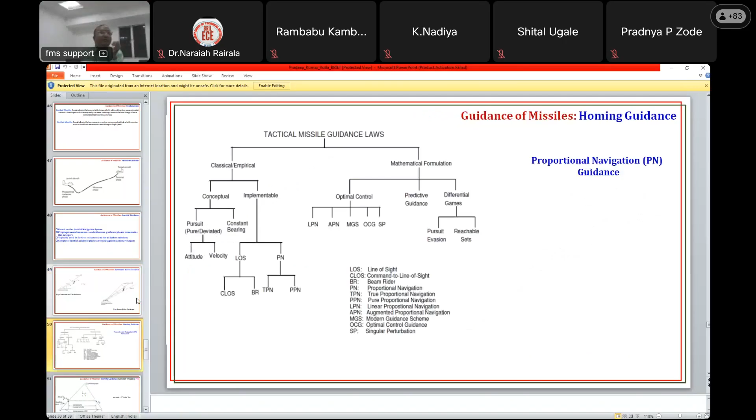For example, if we draw a line from missile to target and call it the line of sight angle - if the line of sight angle is not changing as the missile moves, and they are coming closer to each other, they eventually hit at a particular point in space. That is guaranteed. That is the whole story of proportional navigation guidance.

For that to happen, what should we do? We have a line of sight. The target will have a velocity vector perpendicular to the line of sight, and the missile will have a velocity vector perpendicular to the line of sight. If the missile velocity vector perfectly matches the target velocity vector, this line of sight does not rotate.

In other words, if the target is moving faster in the upward direction than the missile, the line of sight will rotate upward like this. If the target is going downward and the missile is not catching up, it will rotate downward like this. If we can match it - meaning kill the LOS angular rate - the LOS angle is the angle made by the LOS line with a particular reference frame. If the LOS angular rate is forced to zero, then the LOS angle is not going to change and they are approaching each other. There exists a point where they intercept at that particular collision point.

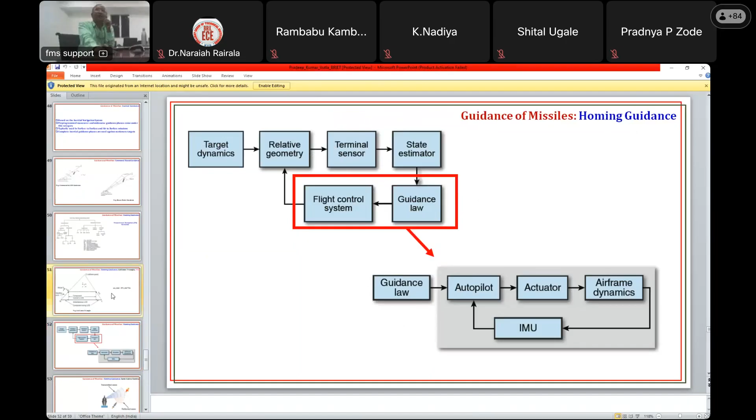There exists a guidance law called proportional navigation. That guidance law gives the lateral acceleration to the autopilot so that the LOS rate is killed. LOS rate gets killed when the velocity component perpendicular to LOS is matched to that of the target. So it is a simple philosophy: the seeker will give a LOS rate, and we make the missile achieve the lateral acceleration such that the trajectory is adjusted so the LOS rate is killed.

In essence, we are pushing the missile to be on this collision course throughout, at a particular event, so that eventually it goes and hits the target. This is the way homing guidance works.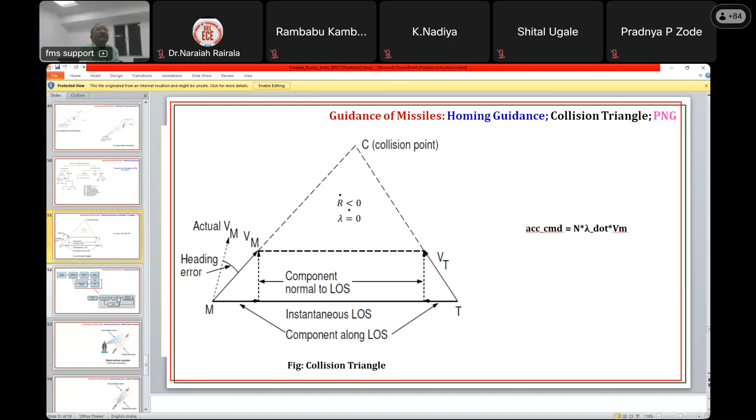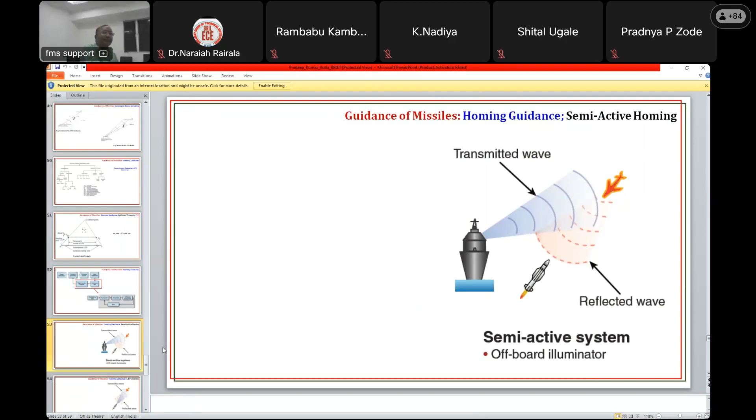With the same understanding, there are radar seekers. That means we place a small radar in the missile. It radiates electromagnetic energy to be reflected back by the target. That means we know the existence of the target there, and LOS angular rates are computed by the seeker, and the missile makes the trajectory such that LOS rates are killed to zero. That means it is placed on this collision triangle. Eventually it goes and hits the target.

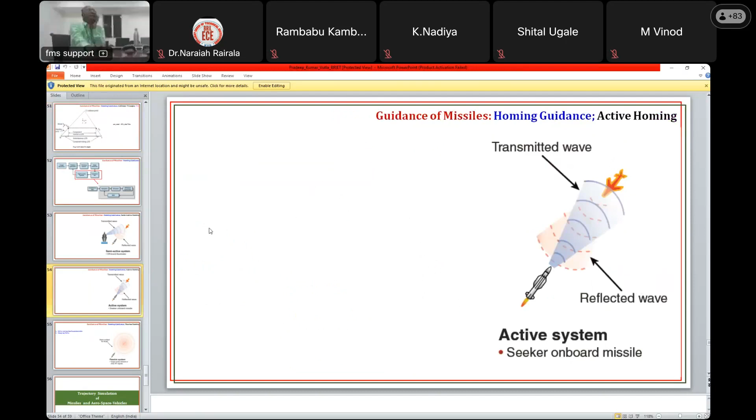These are two parts. The other part is there are passive seekers also, passive homing heads. For example, there is a target—it may be a ship or an aircraft. It has got an engine, and an engine has got heat. There are heat-seeking seekers; that means we are not expending any energy. We are just taking the energy, whatever is coming, free of cost, and going towards that target. This is called passive homing. In this also, proportional navigation is employed to make an interception.

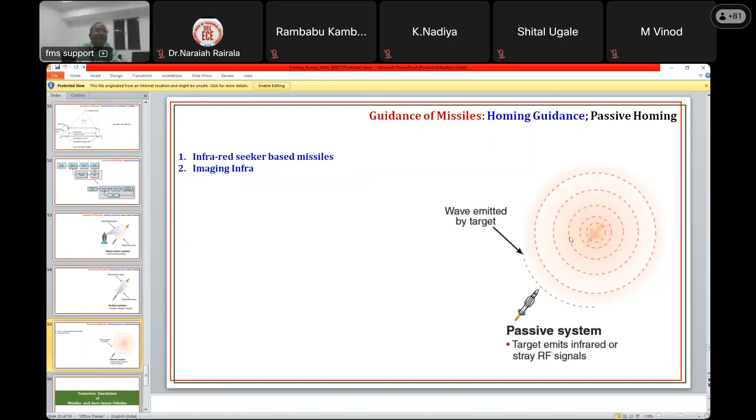So various levels of control systems we have seen up till now in the missile industry, and we design all these things and test them in a simulation environment called 6DOF trajectory simulation environment. In that environment, we have to model the missile and its subsystems with proper mathematical basis, so a mathematical model does that. In simulation, we run those mathematical models and check whether our designs are okay or not. If not okay, we go redesign and design compensators and things like that. This is the way we perfect our control systems design and go for flight tests.

In the field, and evaluate the responses and performance of our designed control systems.

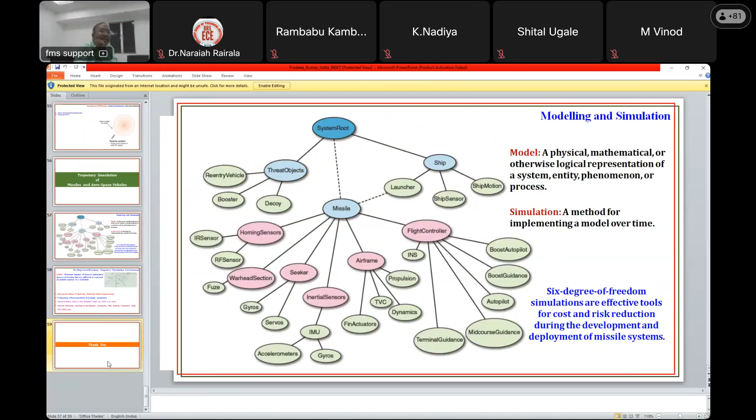Here I stop. This is the whole about missile control system design and things like that. Thank you. Should there be any questions, I am here to take them.